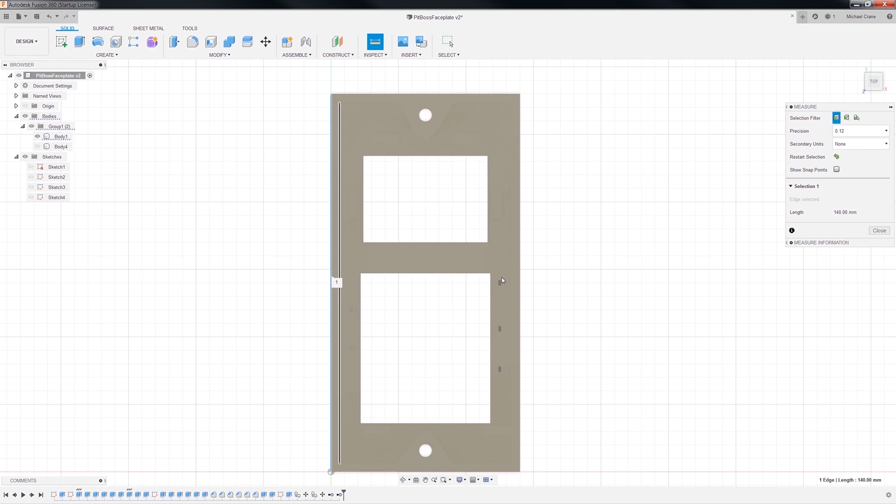I was just looking at this before I started the video, and I think I need to clean up these edges, get rid of them so we can start the new faceplate. Another thing I noticed, I was doing some measuring on the faceplate, and it is almost exactly the same width from here. Maybe it'd be easier to look at it like this, from there to there. How's that? So from there to there is 70 millimeters.

Which is almost exactly the same width as I guess maybe you'd call it height. Let me get a picture of it. It'd be easier to talk about if we had something to look at, wouldn't it?

Okay, so I have a picture of Jeff's Pit Boss controller. I have no idea what to call this thing, I don't see really a model on it. I'm gonna call this Pit Boss Jeff's controller, or Jeff's Pit Boss controller. It has no name other than Pit Boss. Maybe it was their first one. I don't know. Back to what we were talking about.

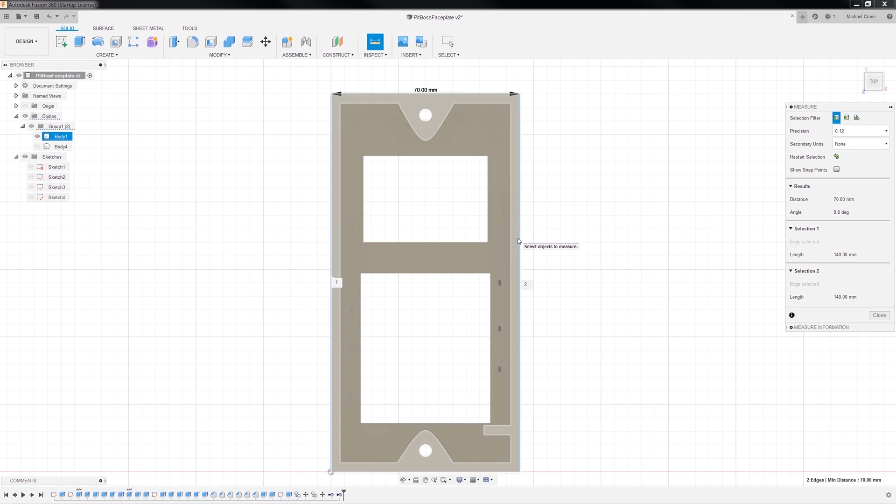So back to what I was talking about, I think first of all I need to get rid of these edges, we don't need those. You'll have to excuse me, I am not a Fusion 360 expert, this might take a few whacks. Let's see, extrude, down, how's that? Okay, let's see, edit. Yeah, so we did 3.175.

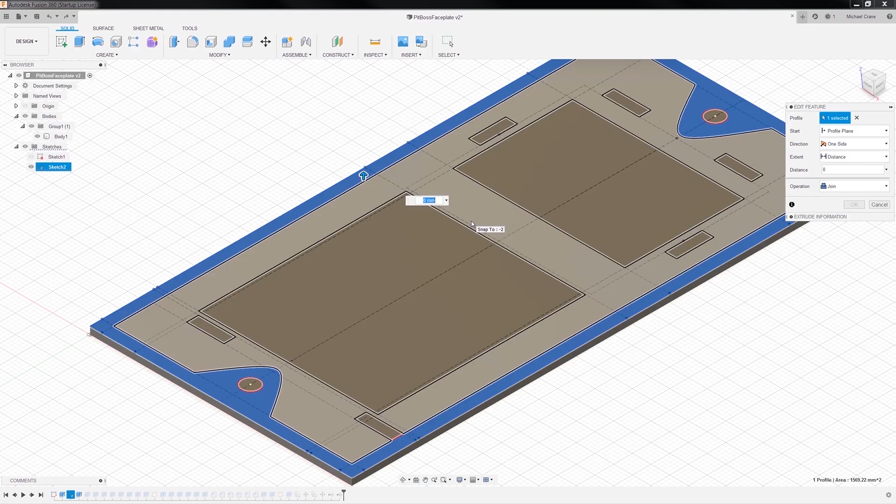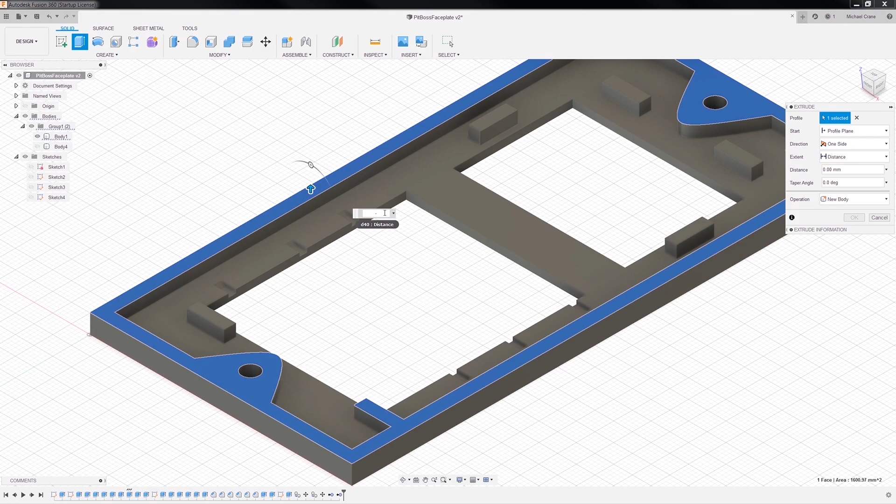If I say distance 0, let's see what that does. Enter. How come it's not letting me enter this? Enter. Okay, well we know it's 3.175, I'll just extrude it back down. I don't know, like I said, so I'm going to say negative 3.175. Okay, there, very good. Oh.

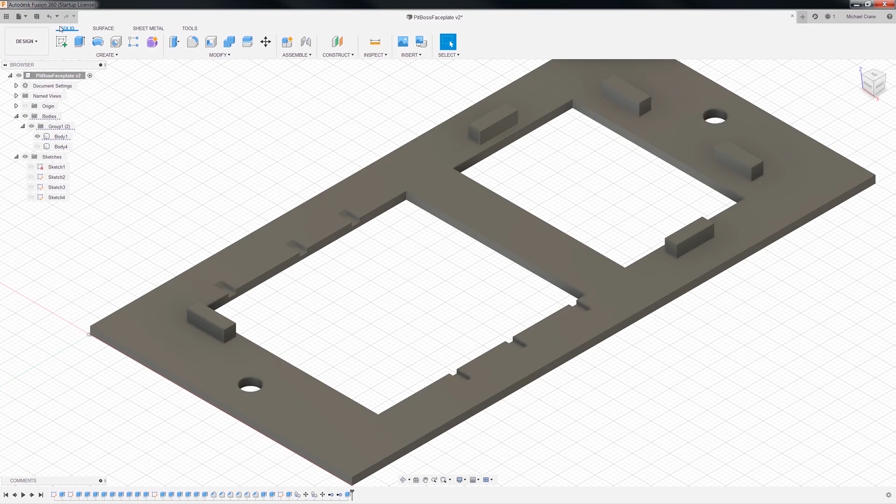We lost one of these little blocks right here that hold the button panel in place, so when I fill it with potting compound, it doesn't move around. And these little holes right here are for the LED lights, so they can light up the button panel, in case you're wondering. Now let me back that off. I guess that's part of it.

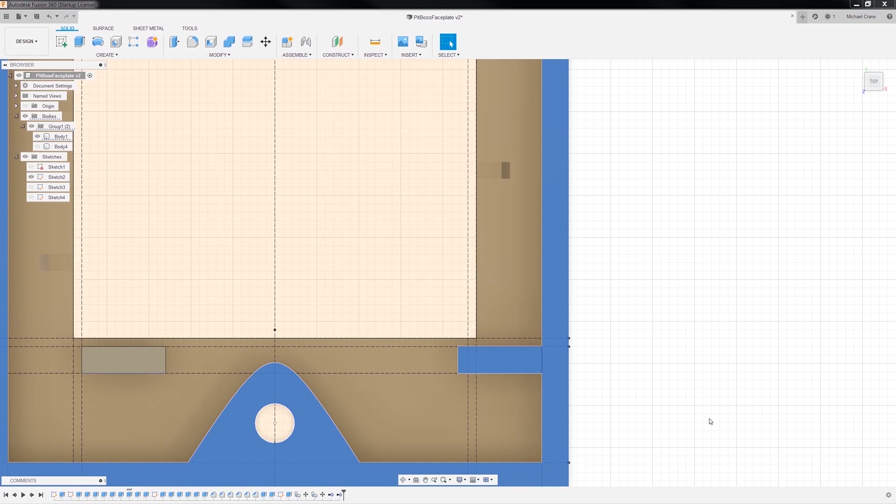Well, we might have to draw another little block to hold that in place. Well dang nabbit, let's see, which sketch is that? Nope. Is this one? Yeah, it looks like it's this one. Anyway, well okay, let's see here, what to do? Let me go back to the profile. I'll turn off the sketch. Okay, let me unextrude it.

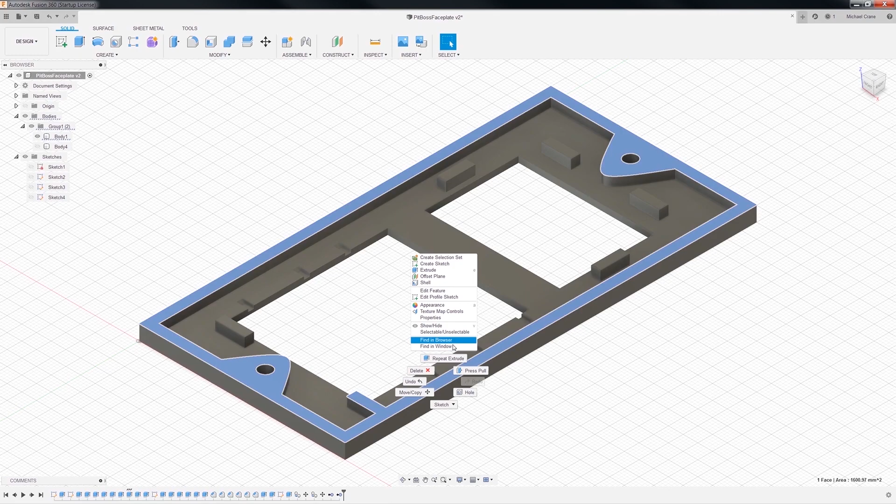That's not gonna let me redo it, so we'll just select this. Extrude, we'll say negative 3.175, enter. Okay, we'll save this.

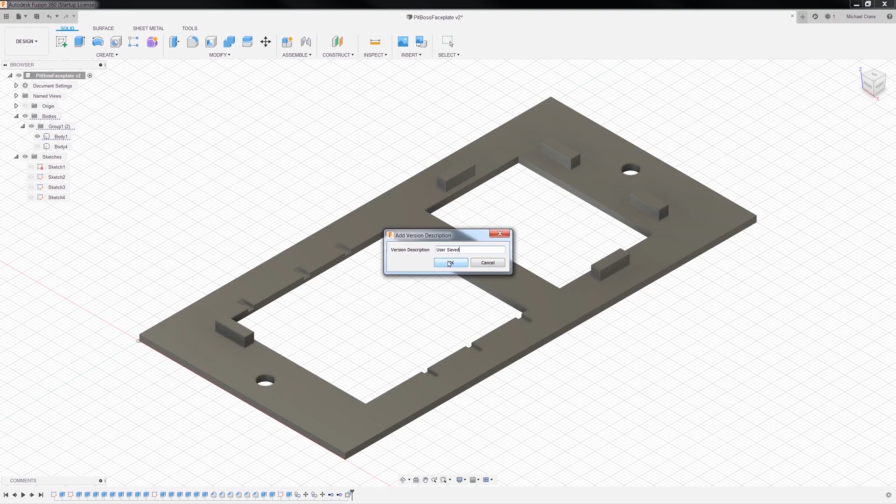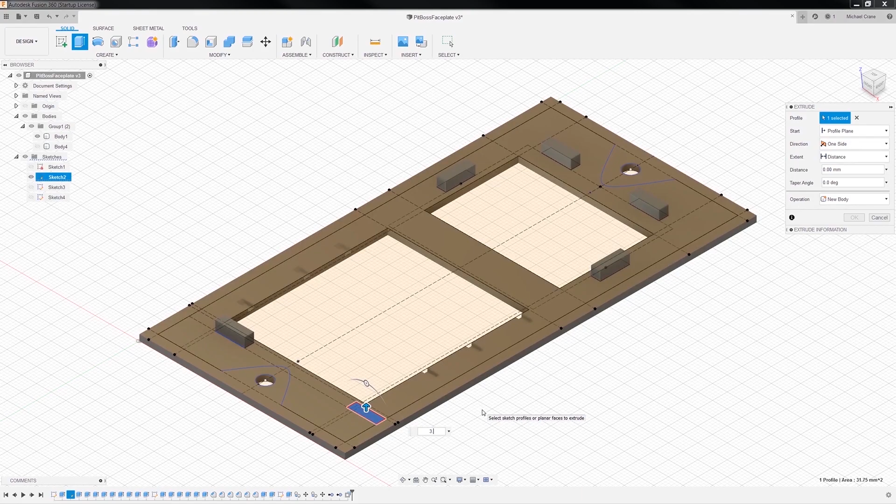Yeah, we'll have to go add this block in there, so let me turn on the sketch. Go to the top, we'll come down here. It looks like I can just extrude this out, let me just try that. Extrude, 3.175. There we go, we'll save that.

Well, it was, I guess once I extruded it together with the sides, it automatically attached them. I hope this little block doesn't get in the way of our new edge, because I don't think so. We'll look at it, let's think about this a little bit.

I think what I'm going to do is try to draw this outside face first before I try to... this has got a raised part, here's the outside face down here, here's the inside. It kind of comes up, maybe a centimeter or so. And it's got these little clips right here that I guess hold it in the barbecue, and I don't know if I'm going to use those, mainly because I probably don't know how to draw them.

I was thinking something more along the lines of how you'd hold an electrical box in the wall. Let me see if I can find a picture of it—okay, something like this. It has a screw right here that screws into this little tab. This tab folds down, so it allows you to put it in the hole in the sheetrock, and when you start tightening it up, the tab flips up and grabs the backside of the sheetrock, kind of like a molly bolt. That's what I was going to put on the backside of this instead of using these little snap-in clips. I think I'll start with the outside of it.

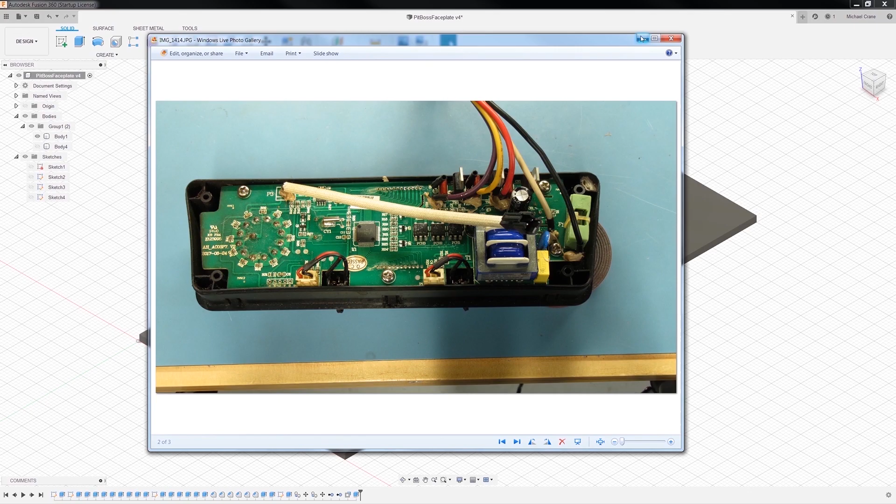So I had another thought while doing the measurements on this. I thought if I crop this neatly around, I could put it in the Fusion 360 drawing and use it to help me with these rounded corners and get the faceplate the right size. You might ask, how? Well, if I can scale it so the measurements are right, then I can just overlay my drawing over this picture. That's the theory. I can't use regular Microsoft Paint from Windows 7, but Windows 10 comes with something called Paint 3D.

In Paint 3D there's a thing called Magic Select, which says it will lift an object out of your image and automatically fill in the background. Well, we don't really want a background, we just want it clear. Click on this, and to use this tool, if you've never used it, you kind of have to help it out a little—get it started, say okay, it needs to be like that, and like that. Oop, it's a little crooked, that'll make it harder, but you give it a head start and say next.

Yeah, see, it did okay, but it didn't quite get it all the way. So you click, you've got add and remove options. Doesn't look like we need to remove anything. Let me make this a little wider here—it is a bit narrow. So I'll zoom in and click up here to widen it up a little. I don't know, we probably don't need to do this, it's probably close enough.

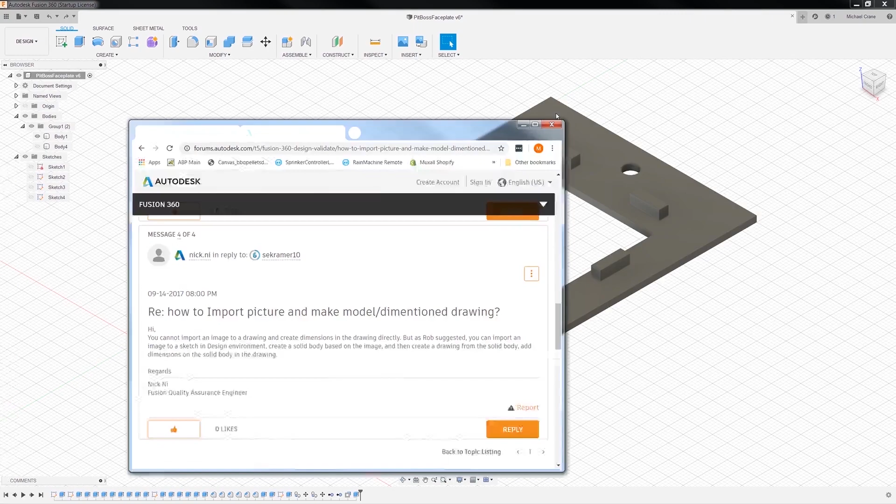All right, let me copy it back over to my laptop. I'll be right back. Okay, so we're gonna give this a shot. Just to let you know, I kind of played with this a little bit off camera. I Googled how to make a drawing based on a picture, and I came up with a very short answer. I tinkered with it a little bit, and I think I can get it to work. Let's give it a shot.

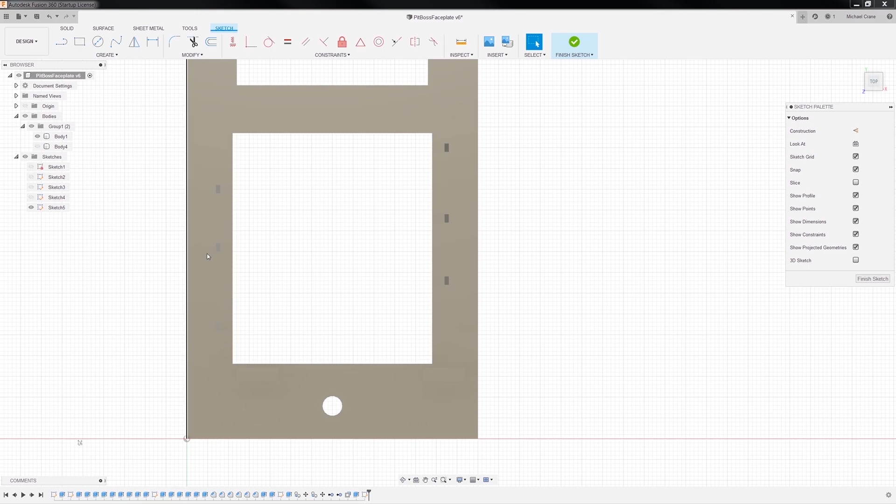They want us to create a new sketch, which makes sense. Turn off this body here. Okay, and we're gonna make this new sketch on this plane, where the Z is pointing up. It makes sense if I turn the body back on, so now you can see what we're looking at. Here's looking at it from an angle, and we're going to be looking at it from the top. Okay, then let me turn this body back off.

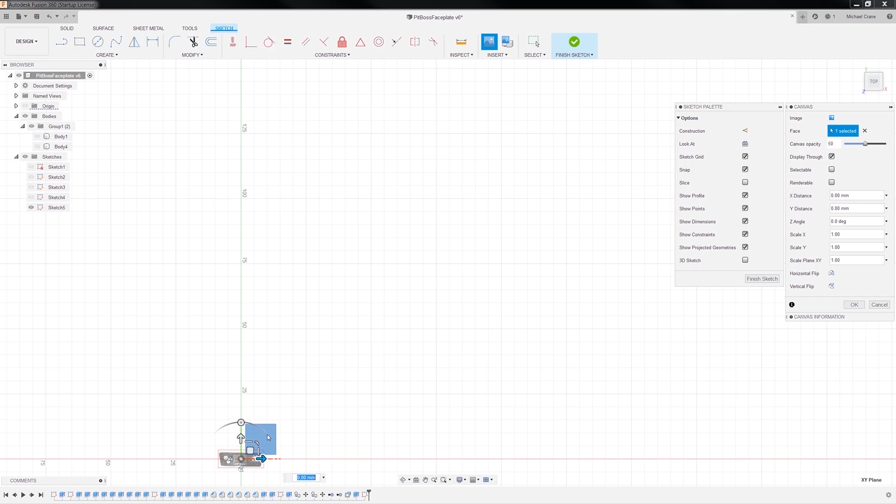Now we're going to insert a canvas, and the image I'm going to use is this faceplate that we just modified in Paint 3D. This took me a little bit. It says it wanted a face, and after messing with it a little bit, I realized I just needed to click on this planar face right here. And of course it made it very tiny, so this is kind of where I stopped. I wasn't sure where to go with this. It's really small, so it needs to be a lot larger.

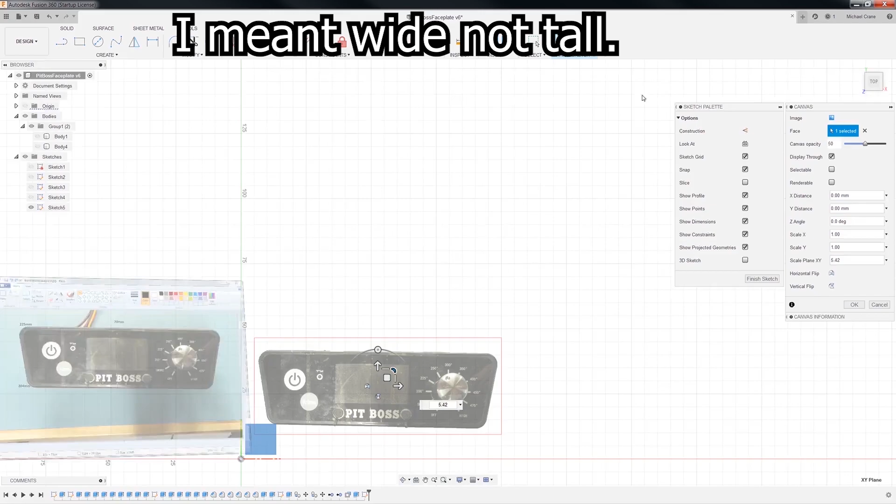This is kind of in centimeters. Let's see, what was that? I mean, sorry, in millimeters. So what did I say that thing was? There's our drawing, so it's 225 millimeters wide. So let's see here, I guess we need to rotate this guy.

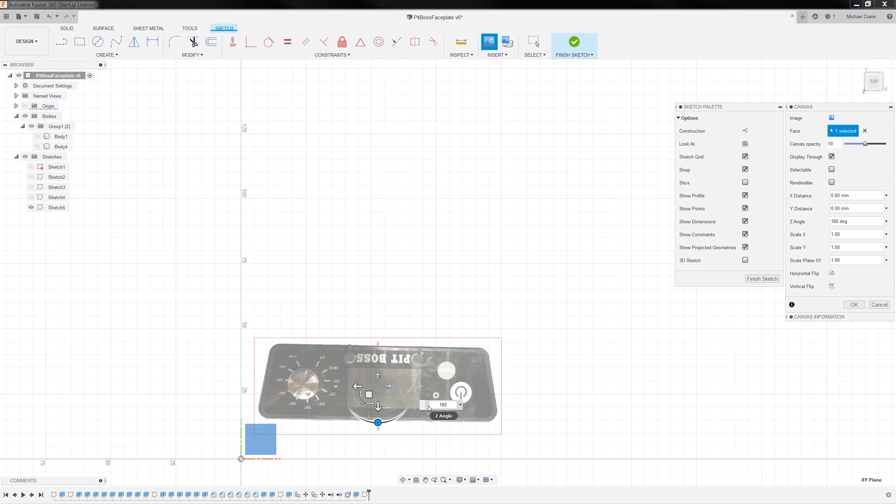So I played with this a little bit too. For some reason, rotating at 180 flips it. I guess that makes sense, right? We don't want 180, we wanted 90, right? There we go. But I did want it facing the other way, so let's do 270.

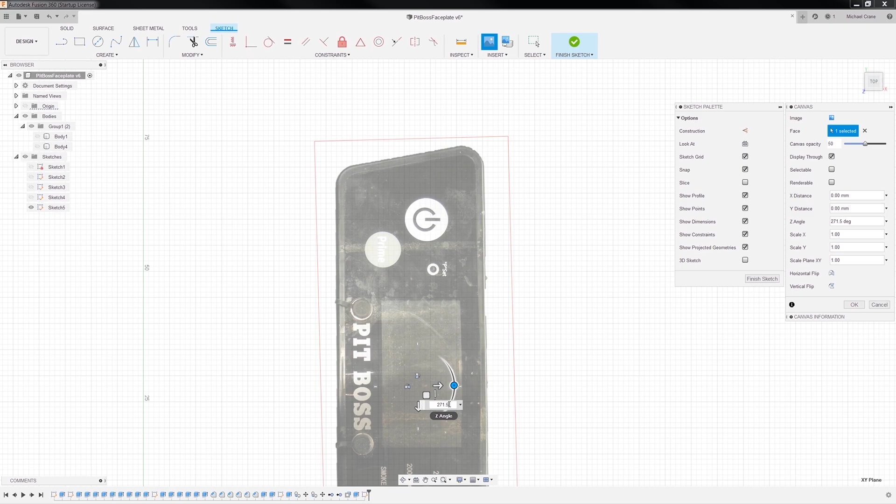There we go. And you can kind of see, should have probably lined it up over here, but you can kind of see these lines aren't straight. So let me see, 271. Oh, that's much better, maybe 271.5. No, 271 looked better. How about 0.25? Okay, that looks good enough for government work. I'll save that.

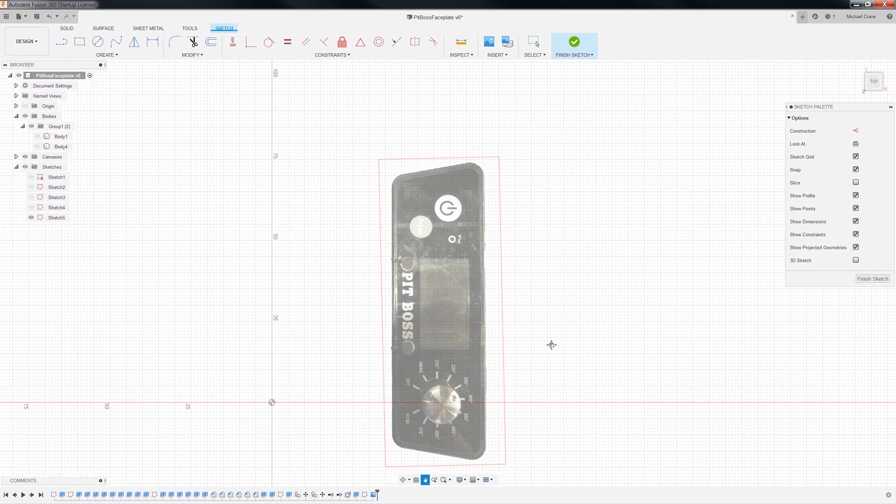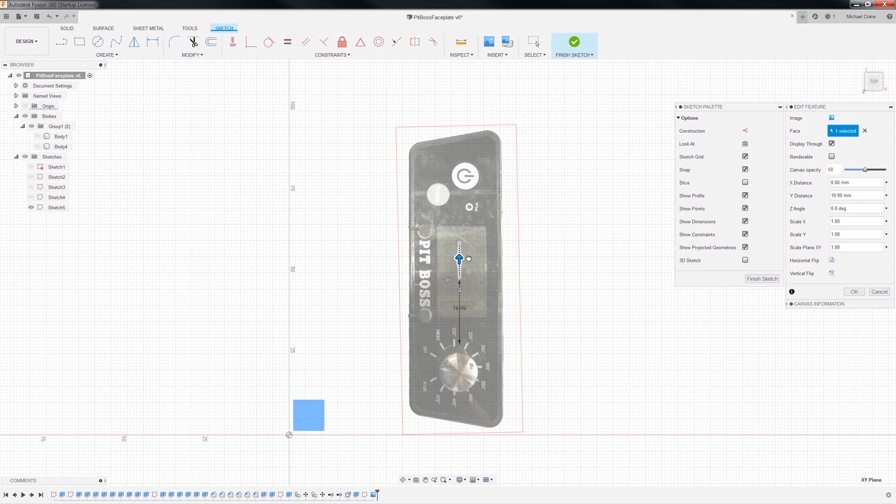Okay, so this thing needs to be 200, and I guess now I need to move it. Let's see, move. Come on, oh, cancel this. Let's see, edit, feature. Okay, here's our move handles, and yeah, I don't really understand the rhyme and reason why I can't just click on it, say move, but I can't.

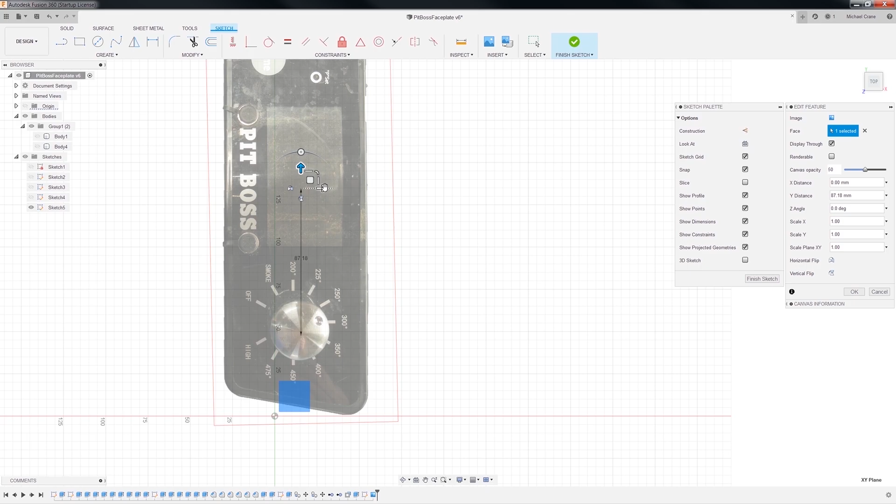Okay, well, we did pretty good on straightening up the angle on it, but yeah, it's definitely not tall enough. We need to get it to 225, which isn't even listed on here. Let's see here, make this guy... whoa, that's a lot bigger. And there's probably a way to size this the proper way. I just don't know exactly what it is.

We might figure that out here in a minute. Okay, so, well, that looks better. We're at 250 now. Okay, so I'm sitting here wondering what to do about this thing, and I can't even sketch a dimension with it. It won't let me put a dimension anywhere on this. I guess because there's nothing to dimension. I guess this picture it thinks is like a canvas or something, I don't know.

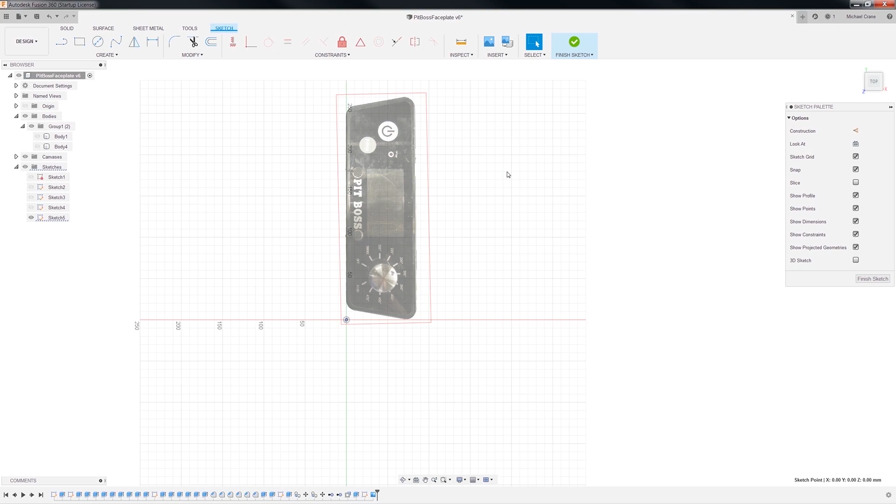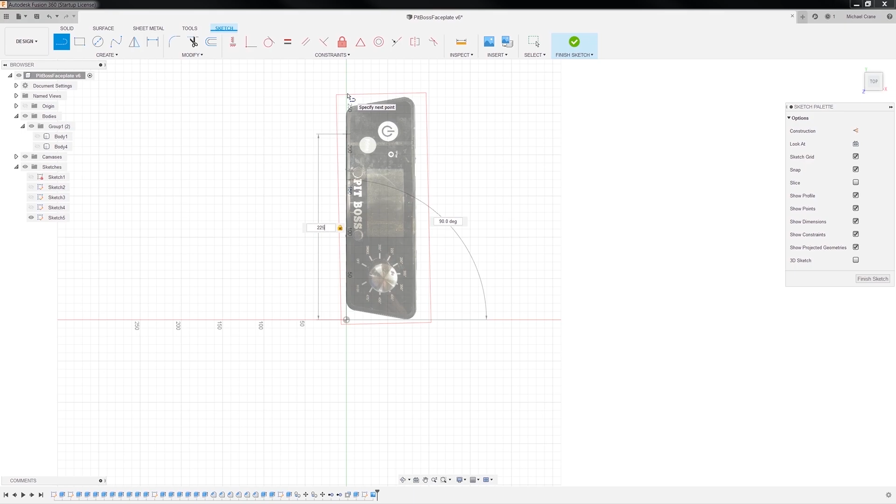So I think I'm just gonna have to start creating some lines and that sort of stuff. So we'll just create a line. Let's see, we'll go up here and we'll make it... let's see, we wanted it, what's that, 225? All right, 90 degrees. Yep. Okay, now let me double check that with the picture. Yeah, 225. So that's going to be this part right here. So let's see, drag this guy over here.

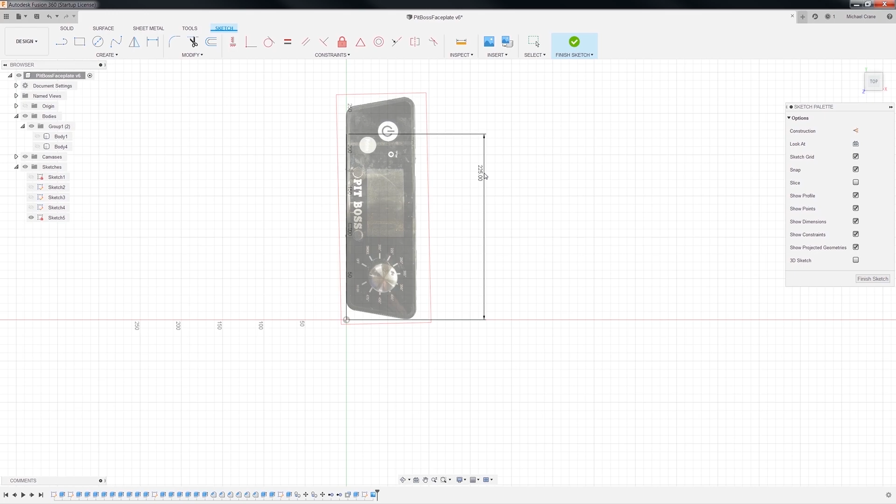All right, so now we can scale this guy down. Edit feature. Oh, here we go, maybe we'll get some finer control. So let's say 0.95. Oh, that looks okay.

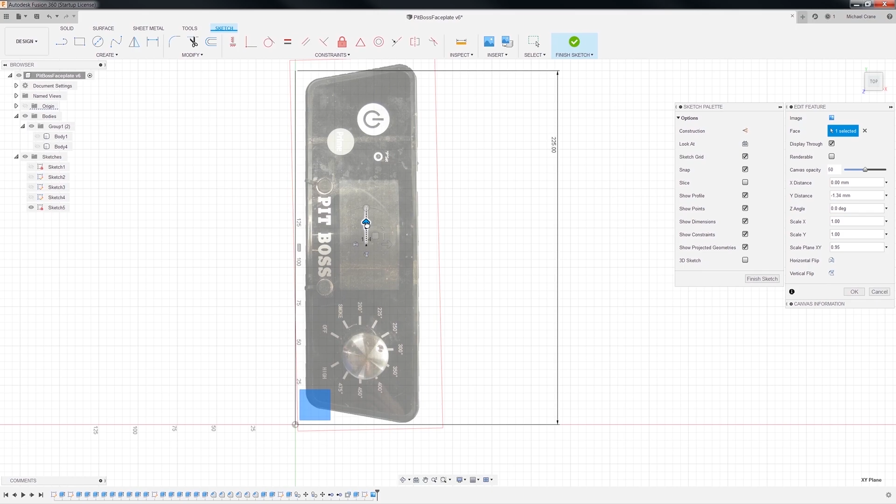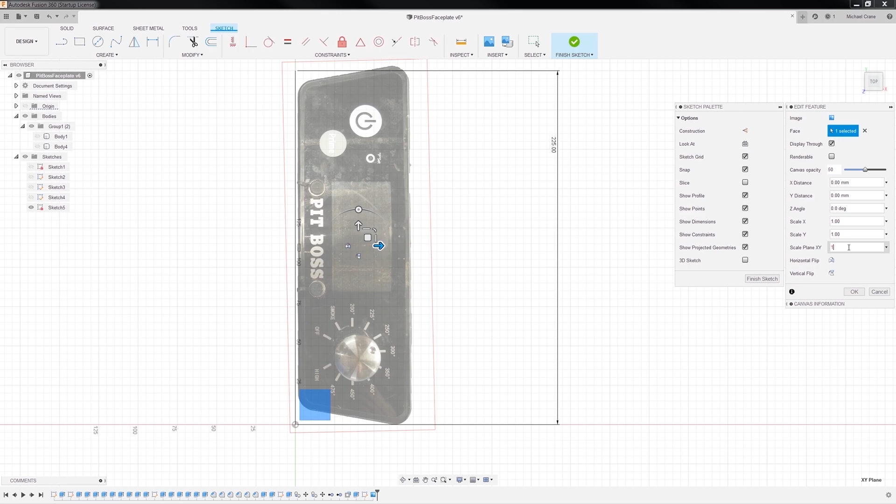All right, let's move them back over here. Well, before we do that, let's finish scaling them. Looks like we got a little bit more to go. 9.4, whoa, oh, 1. Okay, and then 0.99, 9.8. How about 99.5? Whoops, yeah, that makes a lot of sense, right? 0.985. That looks pretty close.

Let's see here, I'll move him down. Let's see, that would be the y-axis. So we'll say negative 0.5. Oh, we're almost there. Negative 0.75. 0.8.

0.9. Is that even moving? Negative 1. Oh, that was too much. 1.75. Ah, there we go. All right, so that's good.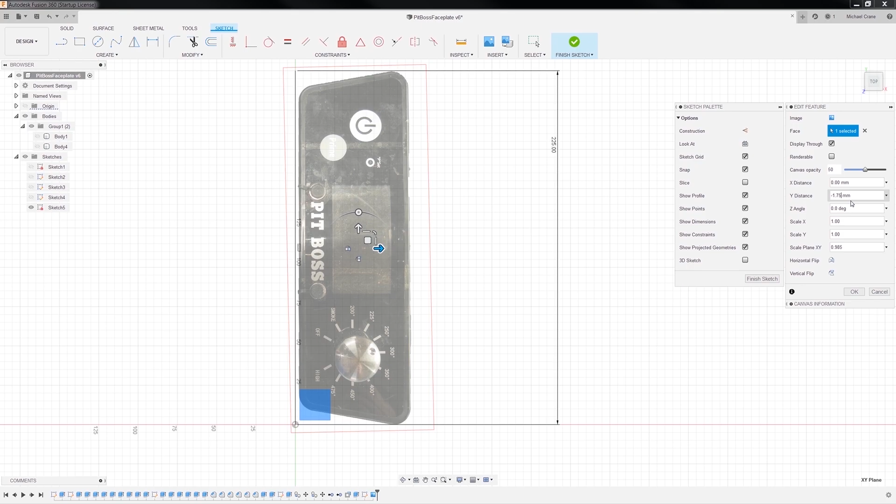Now we just need to move them over to this line right here. Okay, so now we've got our 225 width.

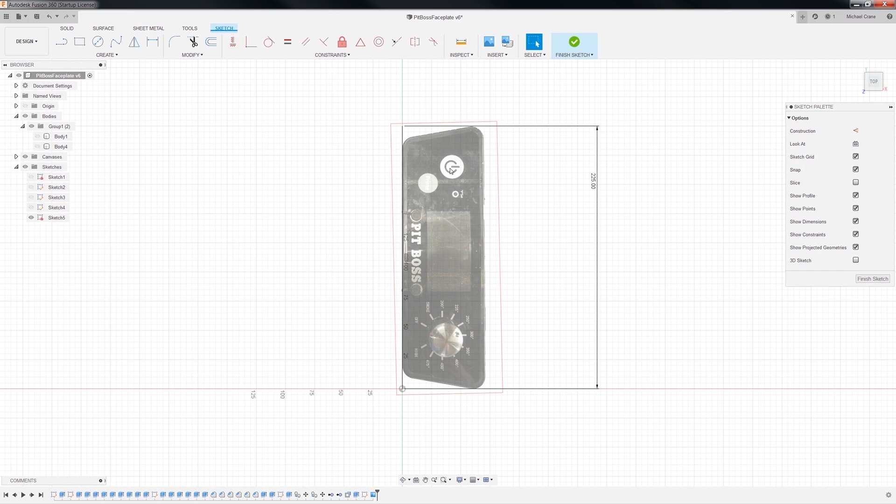I know it looks like the height. Let's see how wide this thing is to see if we scaled it proportionally. So let's see here, I'll probably just have to draw another line, so I'm just going to draw a line. Create a line from here to... Oh, look at that. Huh?

Okay, here's our line. Well, it created the line for us. I don't know why it's blue. That's... I don't know, like I said. Okay, well, there we go.

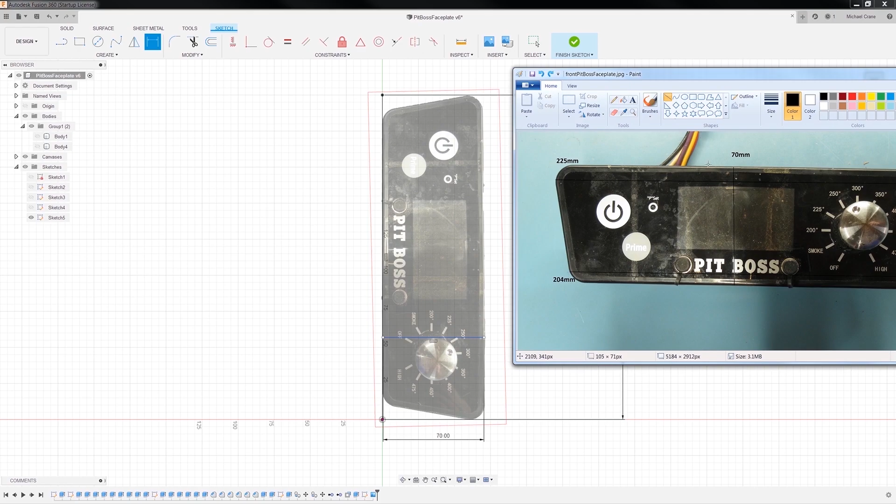Okay, so we know it's... so this is perfect, that matches our drawing, right? So 225 width right here and 70 height, so to speak.

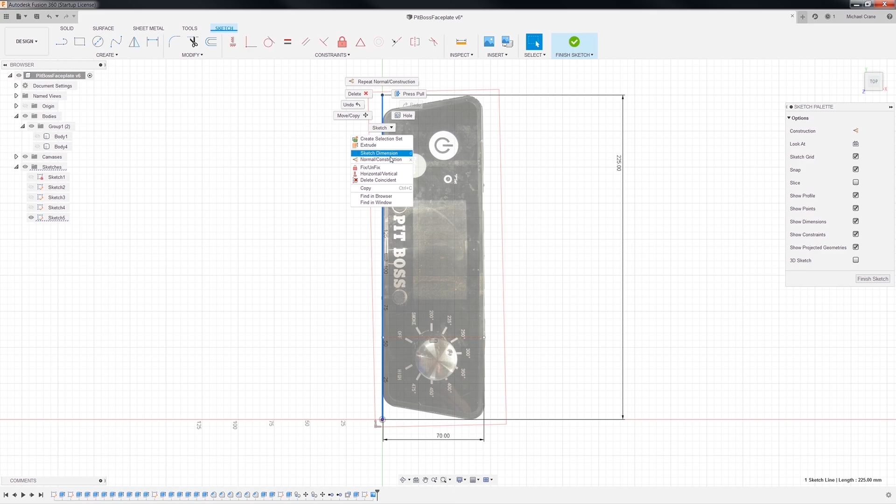Now in Fusion 360, this is something I can show you. So if you click on this guy and then say normal construction, that tells Fusion 360 that you're just making these lines for building, for drawing purposes only.

And okay, so here's a problem. You see how this line's moving around? This is bad, we don't want that. Down here, we need to put some constraints in, and we want the constraint to be coincident, I think, to this guy. There we go.

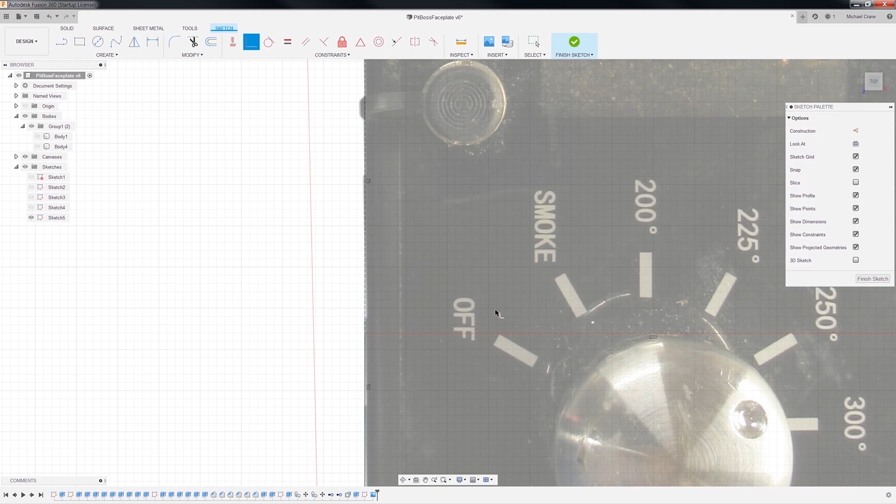Yeah, as you can see, our drawing's not the best, I guess, but this should get us in the ballpark, I think. I think really close, but I'm pretty happy with this.

So now, according to this document, you can import an image and sketch and design environment. We did that. Create a solid body based on the image. Okay, and then create a drawing from the solid body. Add dimensions on the solid body and in the drawing. I don't really know how to create a solid body based on the image, other than create the drawing around it.

So I think we'll just create the drawing around it. I'm not exactly sure what this create solid body based on image is. I don't think I can extrude it, but let's try it. Why not? So let's go home.

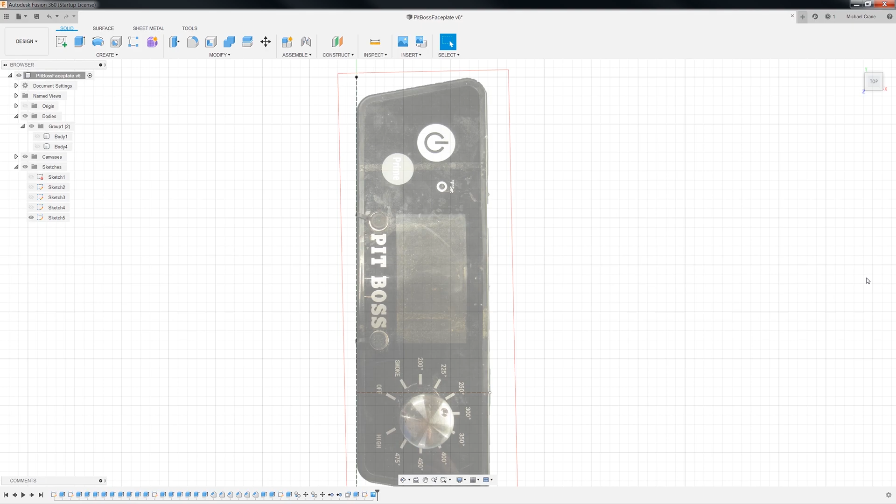Okay, I've stopped the sketch. Yeah, so it won't even let me select it. There's nothing there to select to extrude. So yeah, I don't know what they're talking about. Yeah, I think we need to go back to our sketch.

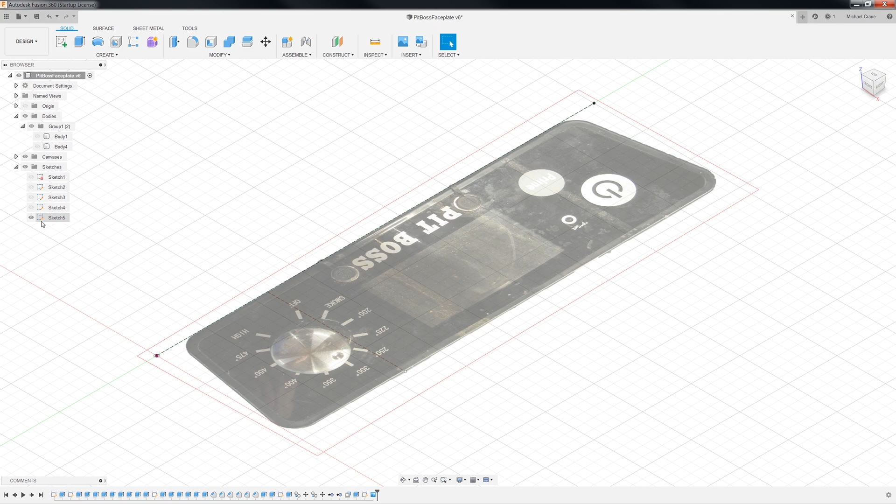And we'll just click on this and say edit sketch. Whoops. Uh-oh, where'd our image go? Oh, what happened to our image?

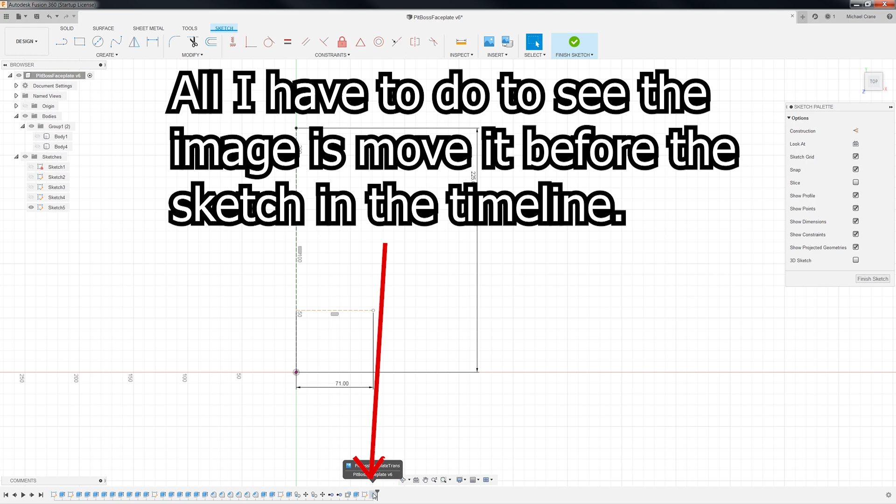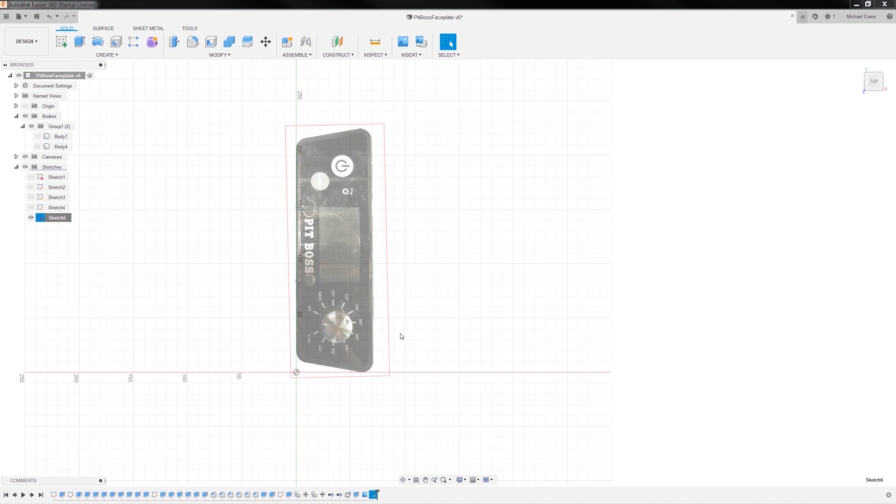Okay, so I deleted sketch 5, which is what I was trying to edit, with this picture in it, and then I just created sketch 6 on top of it, which allows me to edit it, edit sketch, and still view the picture. The only thing it looks like I lost was my construction lines, but the dimensions and everything should be okay. We'll redimension this thing.

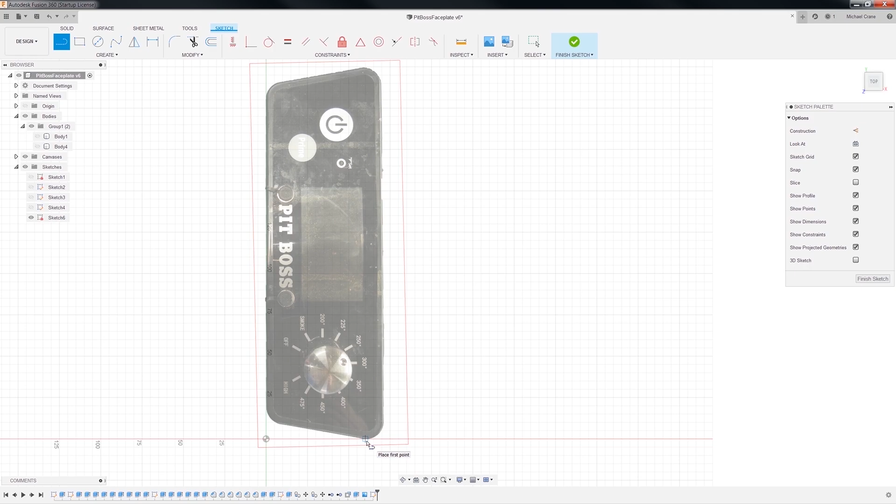I'll put some more lines in here. Okay, we're editing sketch 6. I'm going to create another line. I'm going to do it from this point there to, let's see, 225,

90. Sometimes it's easier just to type them in. All right, move our dimension out. That looks pretty good. Well, we might as well do our other line. Let's see, which one is that? That's 204, it looks like.

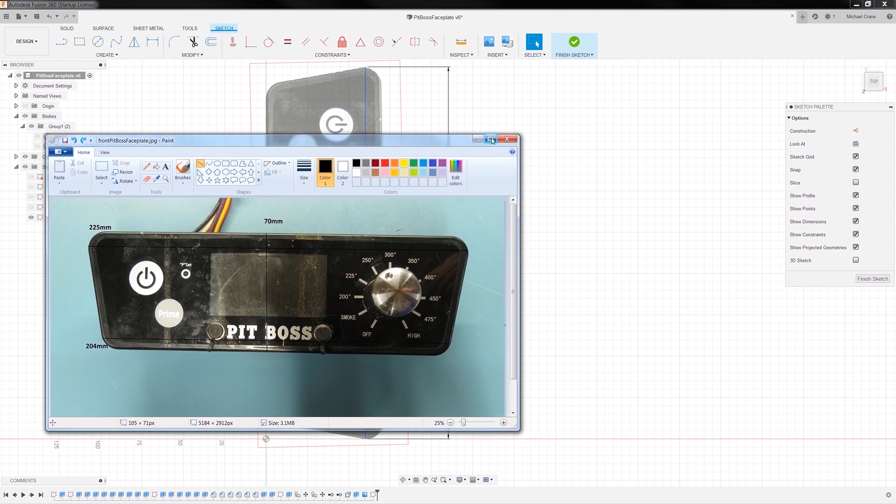So I'll create a line. And I could have just clicked on this, I don't know why I'm not. From there to there. Oh, I didn't see... did you happen to notice how long that was?

Well, let's see here. Let's just add a dimension to our line. Oh, came out, we'll just make it 204. We better save this before it crashes. Not that Fusion 360 crashes a lot, unlike Premiere Pro. Just in case, you never know, right?

Okay, we've got 2 lines. We need a line between these guys and a line here. Let's see, what would be the best way to do this? So we'll create another line.

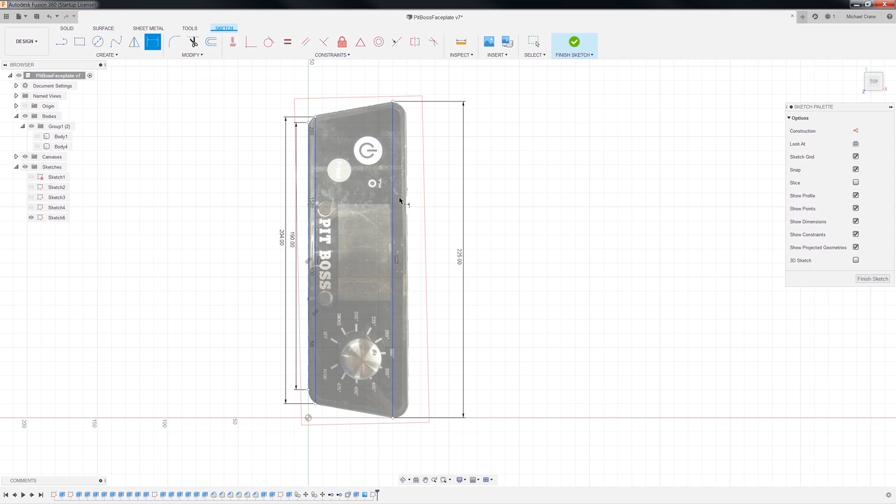It looks like it's trying to snap in place. That might be okay. So it's 190 millimeters, that's good. This will help us create this arc right here. That's kind of what I'm doing.

I mean, we can zoom in and kind of move this thing around here a little bit. I'll have to take off the dimension, and maybe we can just do that. Let me just delete this dimension, and we'll just move this guy. Whoop! Oh, it's trying to redimension it. That looks pretty darn close there.

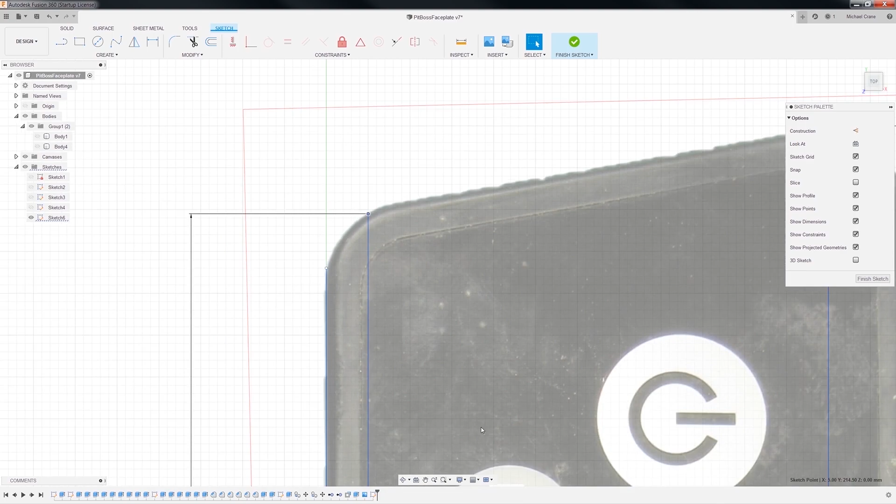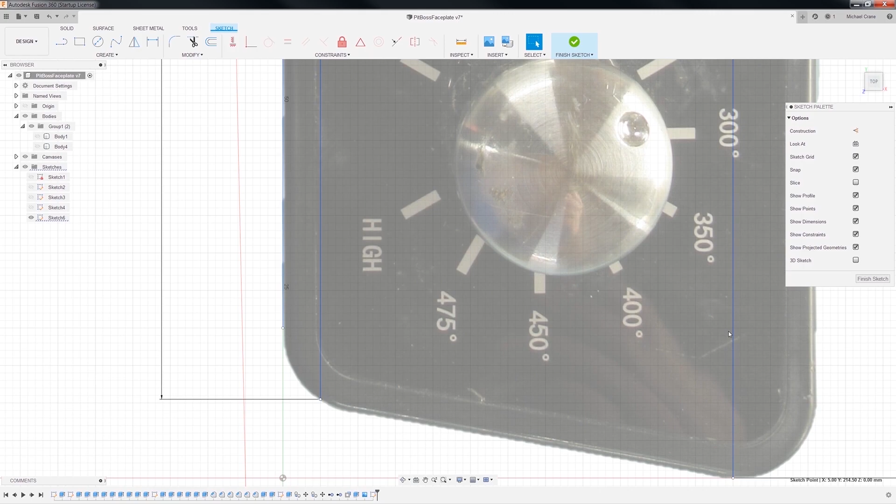Oh yeah, how about this guy up here? I'll move him up. Okay, that looks good there. Let's see, do we mess up our bottom side? Oh, that looks pretty good. Let's go ahead and save that.

I don't know what our second dimension is. I guess we don't really care, do we? Let's see here, let's do this other line. So line.

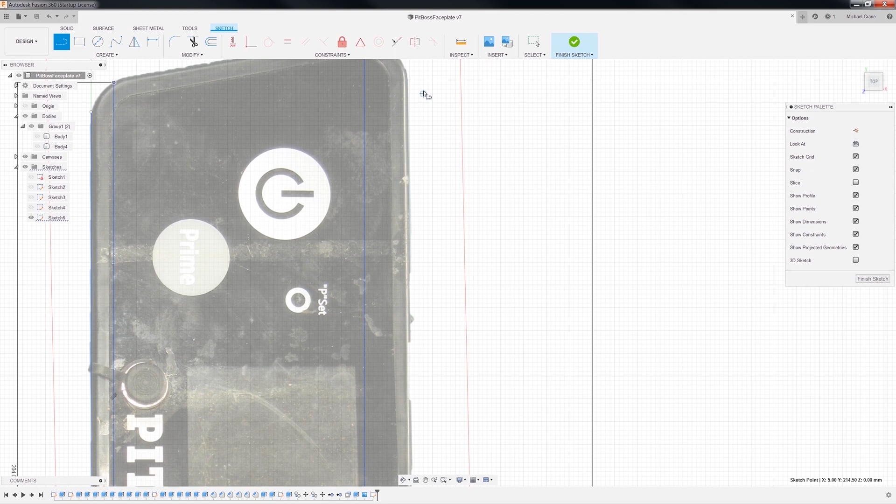This time I'll just put it right. Let's see, how about right there? And right there. I don't know, what is that?

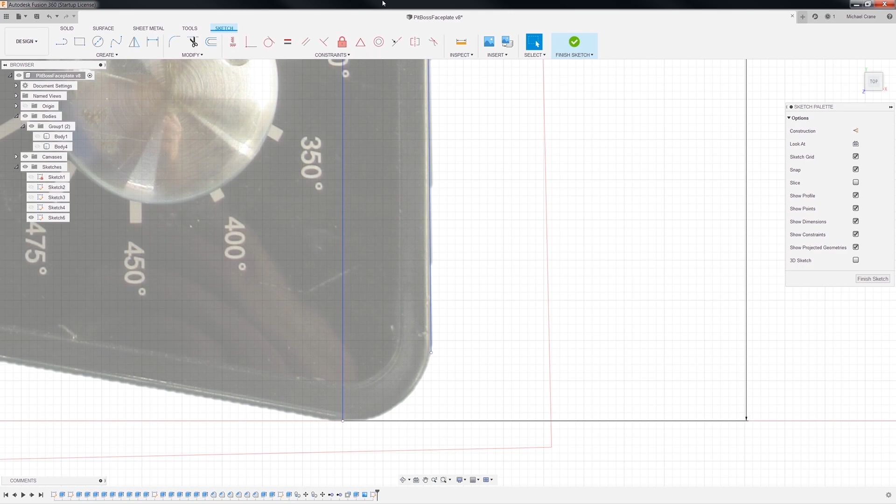Oh, that's another, it's trying to draw another line. Okay. Like I said, I guess we don't really... yeah, see, it's not really wide enough.

So let's see, let's move this guy down here. Yeah, I don't know if I like that too much. Oops.

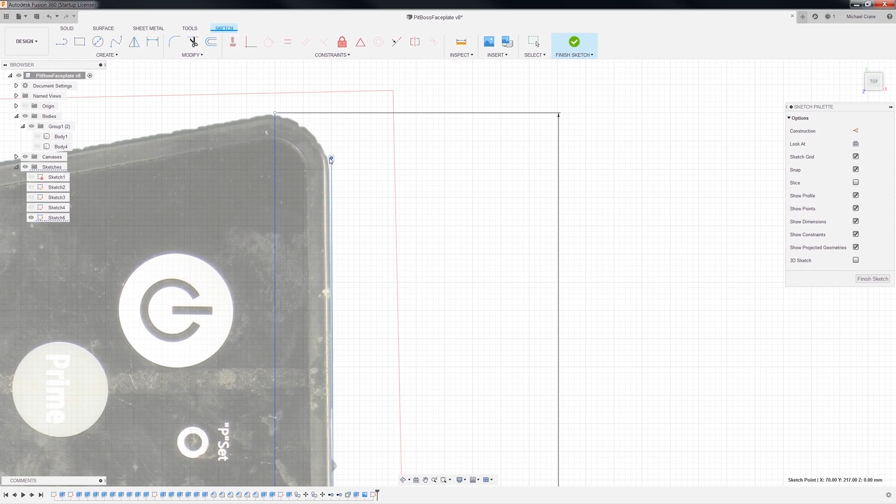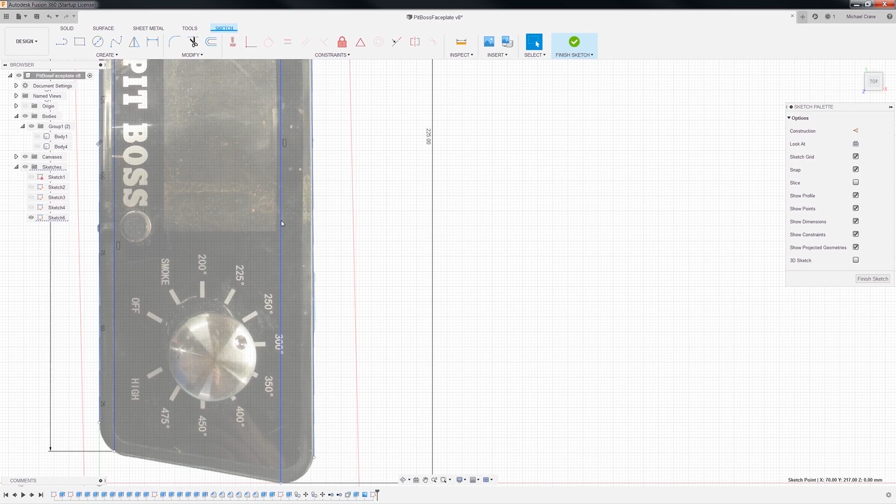Now let's see. Well, I guess what we need to do now is check it. I'm going to go ahead and save this. I don't think this thing is square anymore. I think I messed it up.

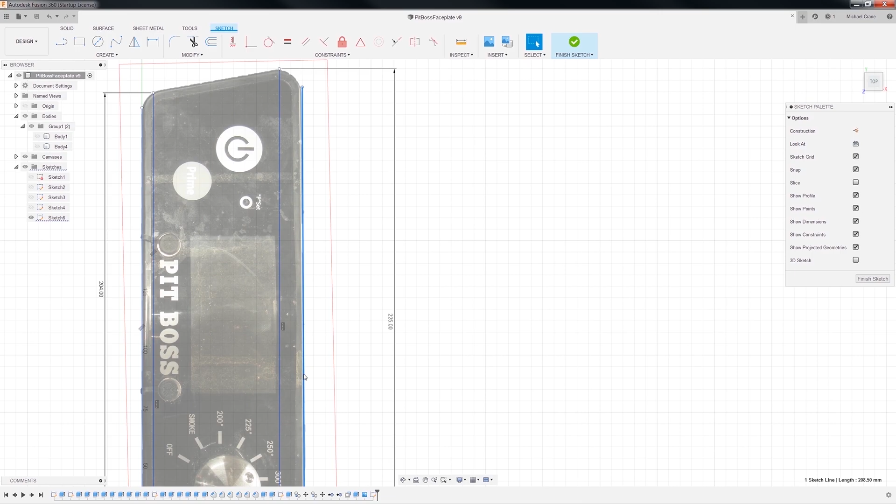Let's see, how do I edit this line? This is something I've struggled with in this program, trying to figure out how to edit things that are already there. Without redrawing the line, I just kind of left it, but then it dawned on me, I can just draw another line.

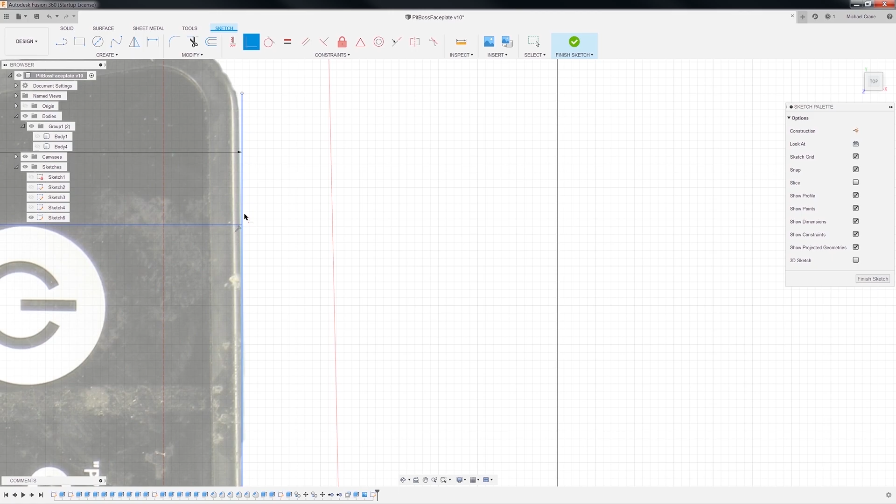Oh, by the way, this should be a construction line. Normal construction. These are actually outlines. I'm going to add a construction line between here and 70 and 0. That's kind of interesting, it looks like it actually pushed the other line out. Let's see if we can bring them back together, so from here to here. Did that fix it?

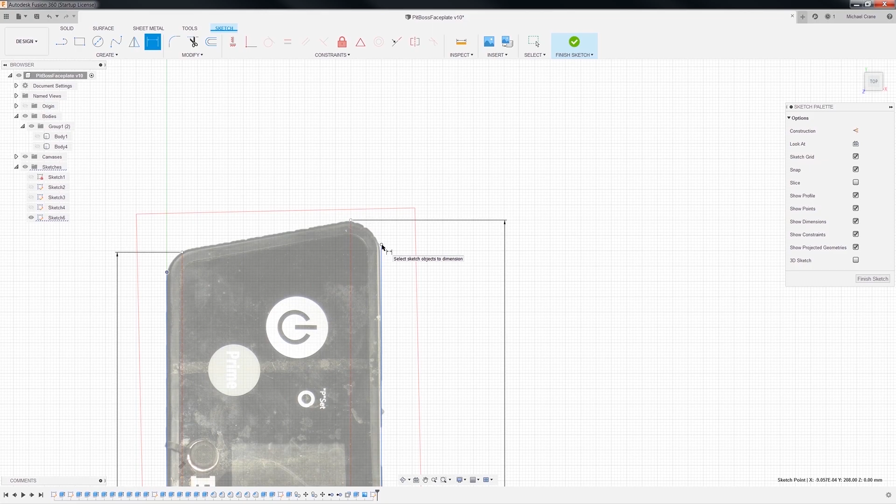Yeah, so we know this is 70. Let me bring this guy up. Actually, you know what, I didn't even need the line. Yep, my bad. You can use just the regular dimension, so from here to here is 70. Enter. There we go.

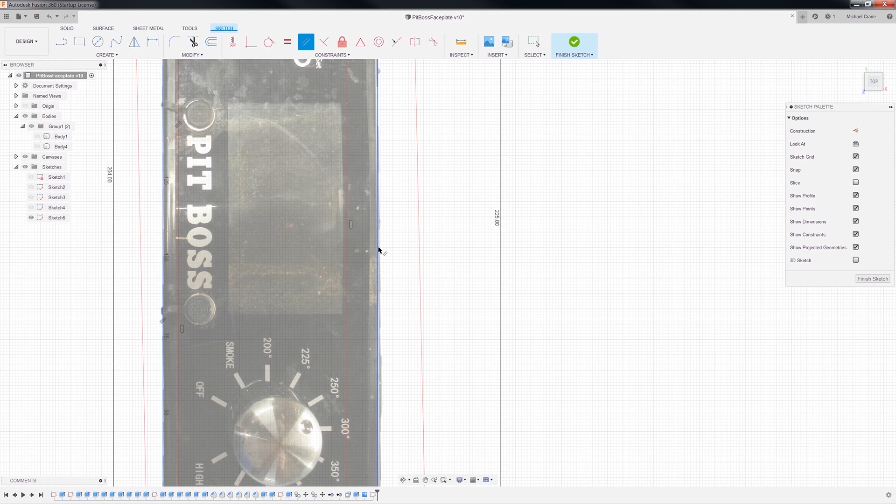We can put another one on the bottom, but you can also put a constraint to say that it is parallel. Let's see, the parallel constraint. There we go.

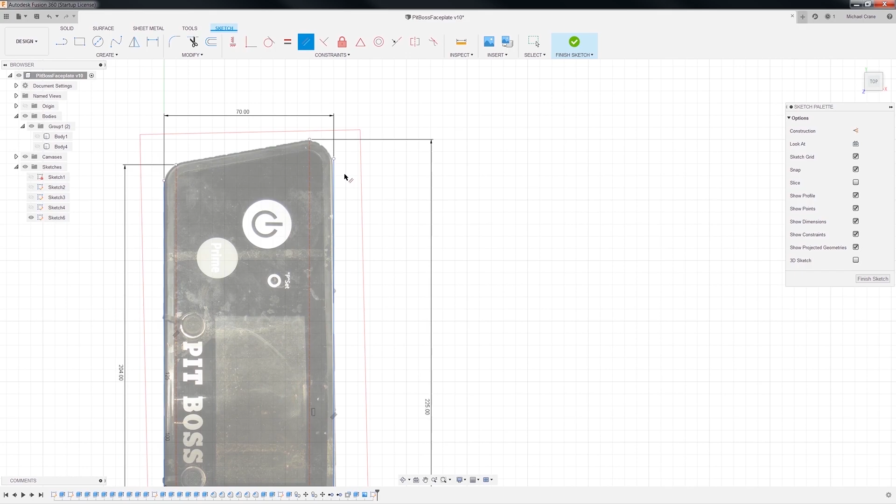I know the picture's kind of hanging out a little bit. It's probably the image that's a little bit crooked, right? So now that we start drawing lines, you can see it's a little bit wider at this side than the other side. But I mean, it's really close. I could fix the image. Let me think about it a second.

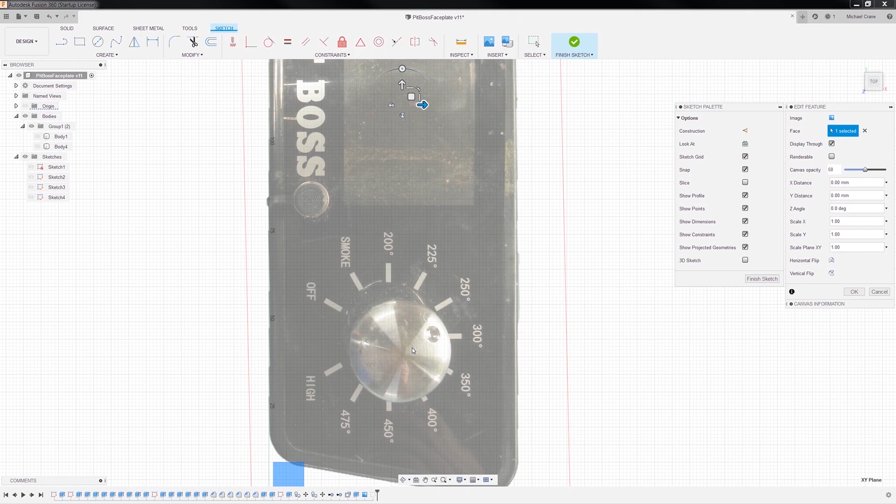Okay, so without breaking this thing, I'll try to rotate it just a fraction. Let's see, edit feature. I'll click on this little rotate guy. Where's my little box? Oh never mind, I can do it from right here. Let's see, Angle Z.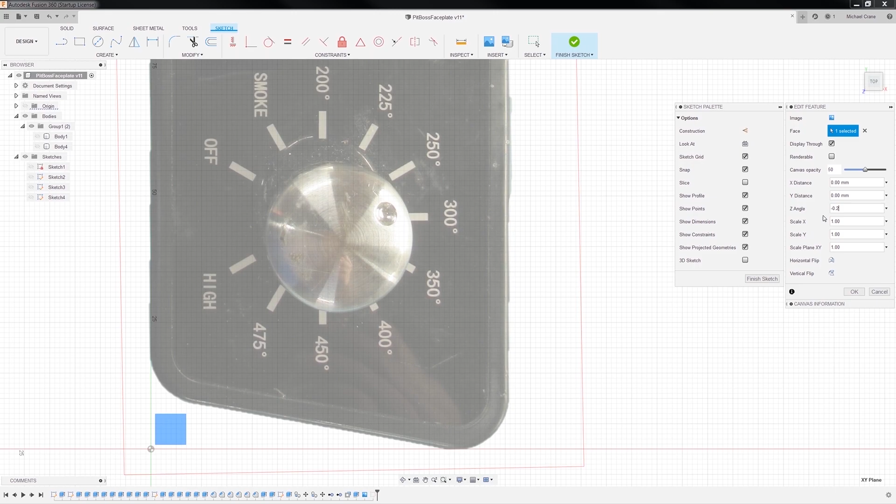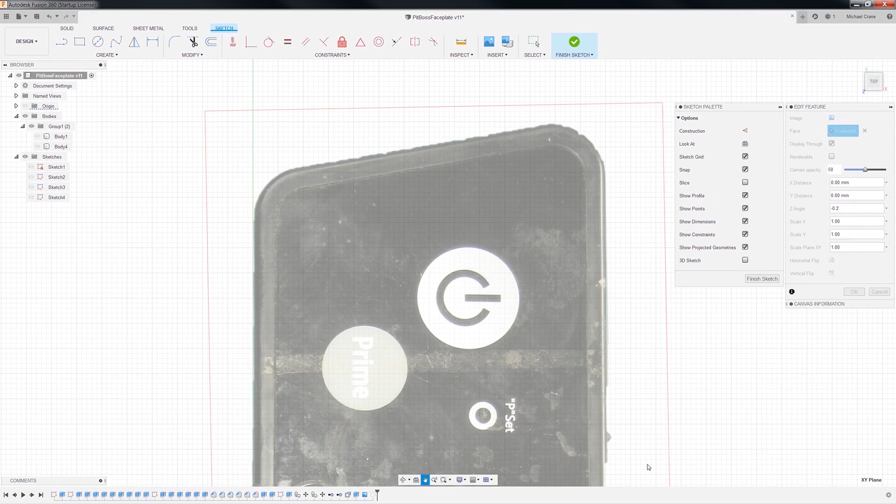So what is that going to be? A positive 0.1? Nope, then you go figure it's negative. How about 0.2? Okay, I can kind of see. Let's see what the top looks like. Oh, we lost our lines, that's why. Well, let's just say okay.

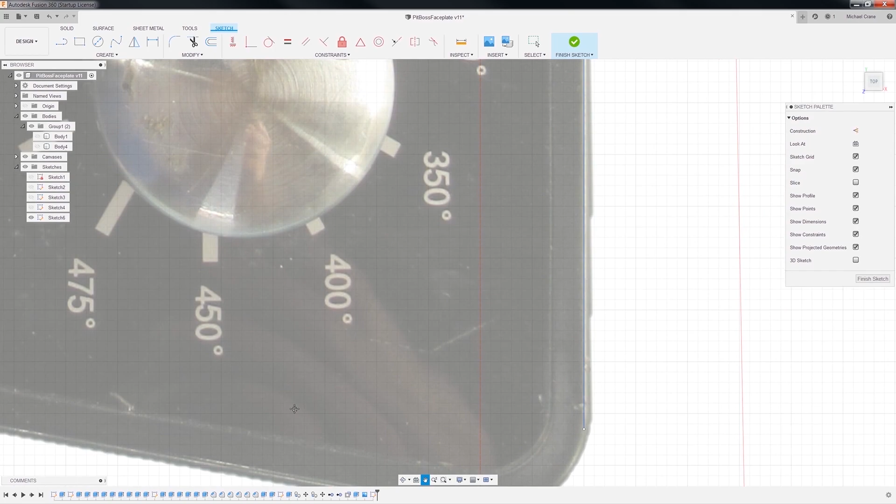I don't know, this picture is probably not very square. I'm not going to mess with it. I think we're pretty good now. Yeah, I don't want to rotate it anymore because I know it's 70 millimeters across, and I know it's 225 millimeters.

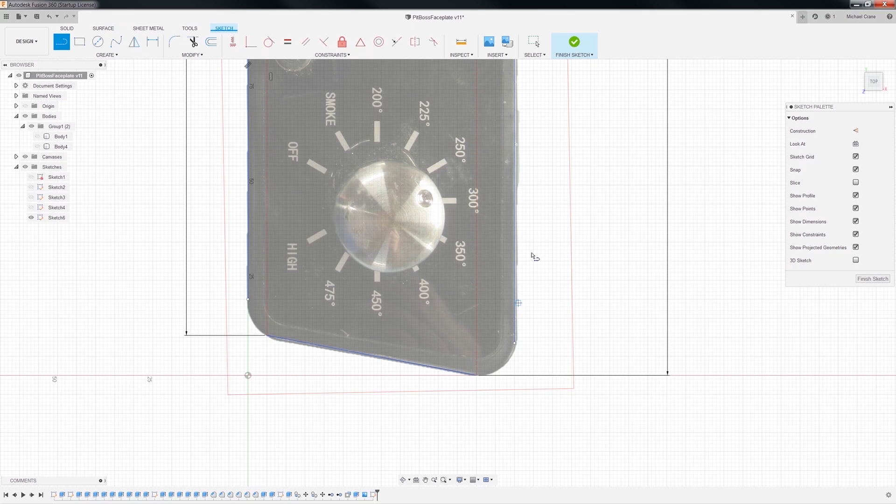So we just need to add some more lines, shall we? Okay, so here's a line. Let's see, we want to go from this point to this point. Okay, and we want a line from this point to this point.

Okay, now I need a curved line. Okay, I think I found what we want. Let's try the arc, 3-point, using arc using 3 points. Let's start using 3 points. Well, I could have sworn I've done this before.

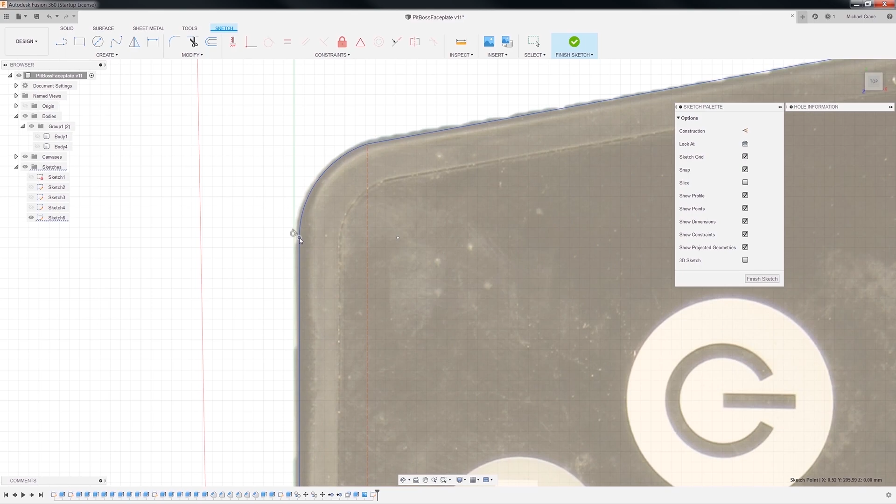Ooh, that looks much nicer though, doesn't it? Yes, I do like the look of that. Yeah, much better. Yep, I definitely like the look of that better.

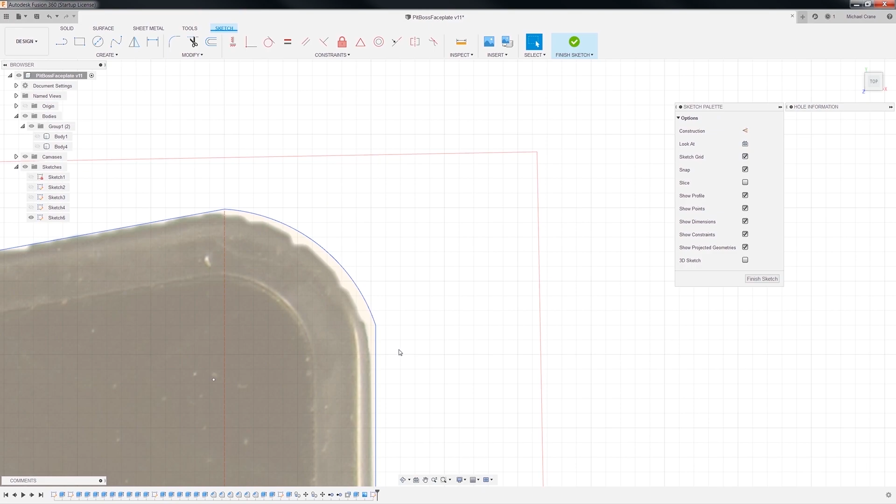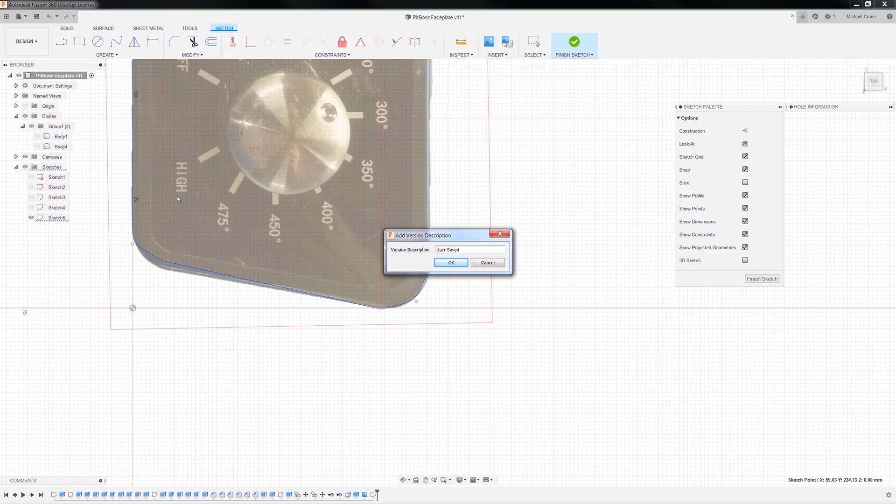Let's see, delete, arc. There we go. All right, let me save this real quick. Oh, why is this? All right, well, we'll come back and fix it here in a minute. Create arc.

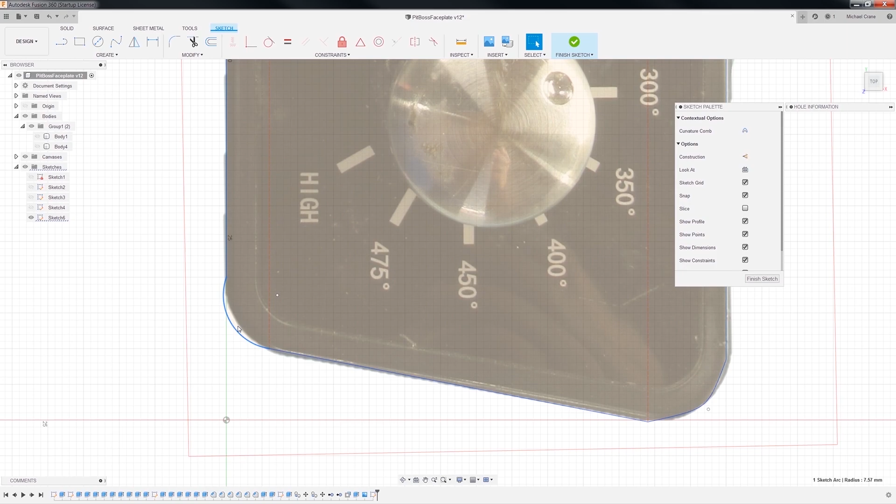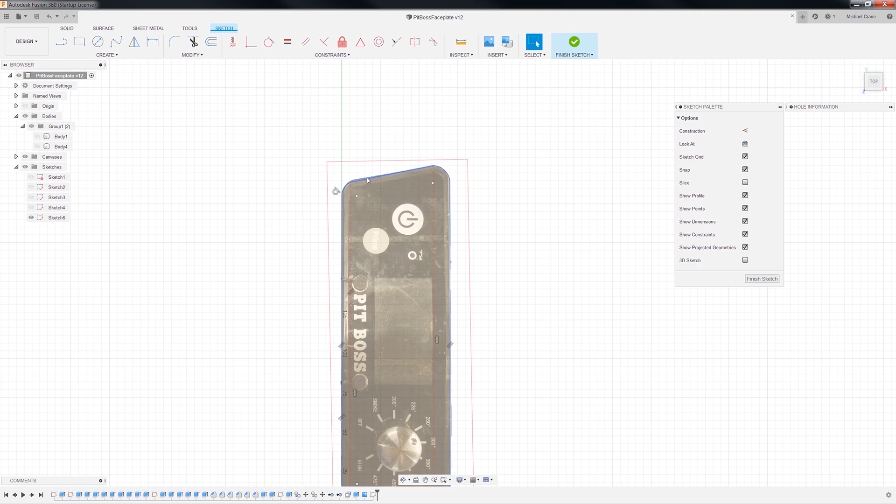Right, let's see here. Whoa. Yeah, that looks pretty good. Let's see, oh, did we break anything? Yeah, we're kind of messing around. I need to probably put some more constraints on this thing, but let's get all our arcs in first. Yeah, that's starting to look pretty good, isn't it?

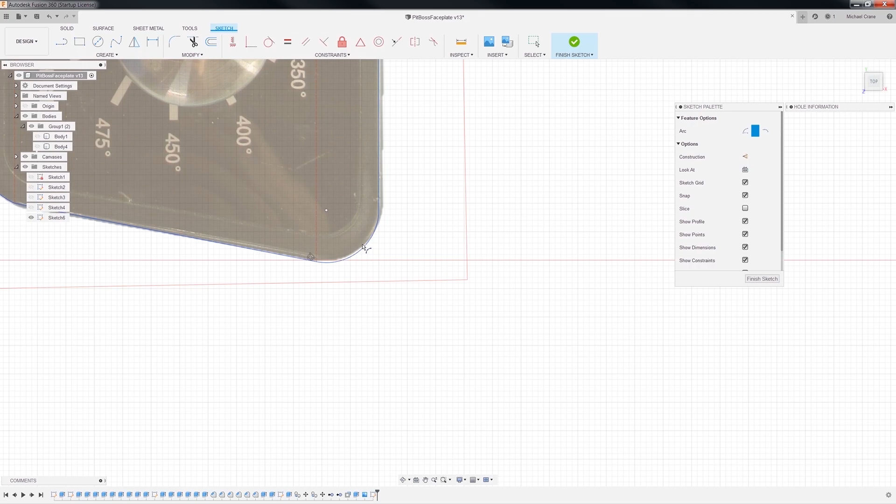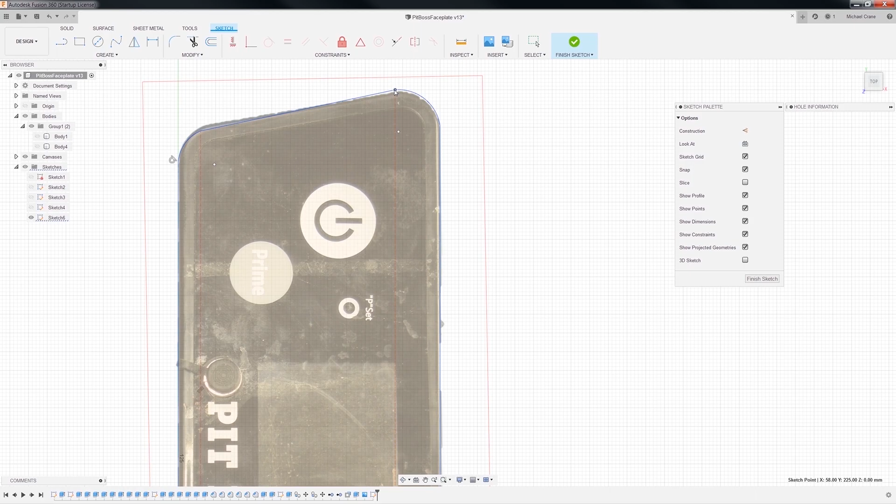Let's see, delete, create arc. All right. Well, it doesn't look as pretty as the other one. Let's see, what did we mess up here? Yeah, this got pushed a little bit out. Let's see. Yep, that looks okay. This looks okay, yeah.

Okay, so I'm gonna call this pretty good.